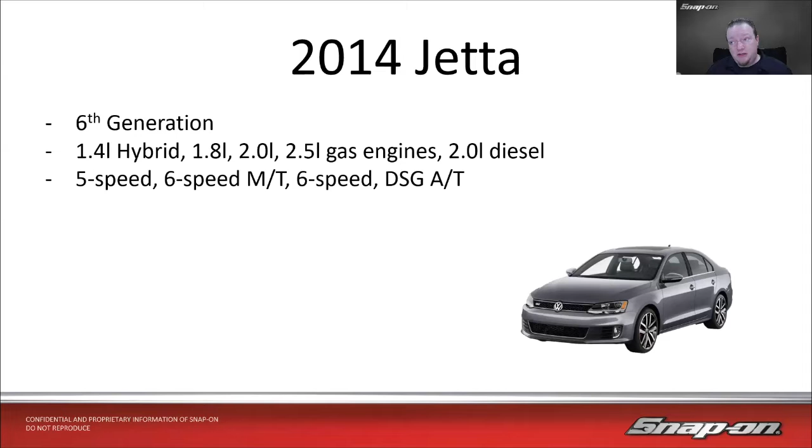And then also, there's a lot more manual transmissions in Volkswagen. It's harder and harder to find a manual transmission vehicle over here now, so they're just kind of hanging on to that.

Representative Audi is going to be the 2018 Q5, because that was the top model, and the top year would be 2018 for sales. It's a second generation - it hadn't been around for all that long. A 2 liter gas engine was the only available one there, at least in the US and Canada. It's a 7-speed DCT automatic transmission, so there's that dual clutch automatic.

And then we decided, like I said, we're not going to talk a ton about Porsche, because I think we're going to actually end up breaking that out on its own, since it's unique enough the way they do engines and things.

The 2019 Macan was the high water mark for that year, and it's been slowly going down, which is not good for them. It is the first generation of the Macan, actually launched in 2014, then refreshed in 16, and now 19 was the second refresh with body panels and styling changes.

2 liter turbo and 3 liter turbo gas engines were available, and it's actually built on the same platform as the Audi Q5, with an automatic DCT transmission. This 2019 model year is where gasoline particulate filters started being standard on the vehicles.

I haven't seen a ton of them over here yet. There's not that many vehicles that use them. Over in Europe it's more popular, the gasoline particulate filters, but I think we're going to start seeing them over here more too. It's very similar to what they do on diesels - just filters out the small particulates in the exhaust, and you have to do regens and things like that too.

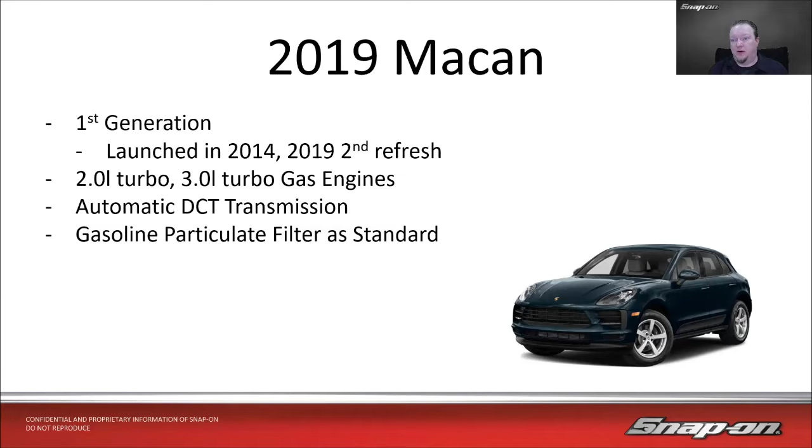So yeah, that is our Porsche representative for this. Let's talk some common issues, going through the data we have - repair orders and such. What are the most common problems that we see?

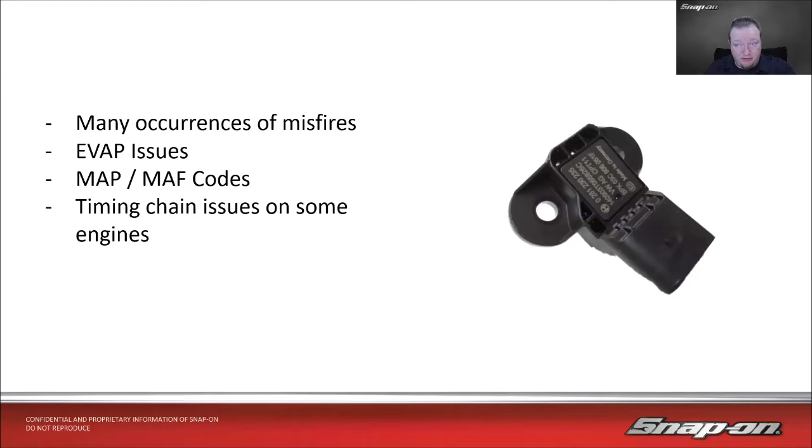Misfires, just like a lot of other manufacturers, a lot of misfire occurrences, a lot of coil-induced misfire problems, evap issues - and that seems to be kind of across a lot of OEMs, just because the tiniest little pinhole leak in that evap system can throw a code since they want to keep those emissions down. Map sensor and mass airflow codes as well - a lot of those seem to bubble to the top for some reason. And then some of the engines also had timing chain issues between the guides, tensioners, and the chains themselves, so a lot of timing chain repairs on certain engines and models.

00262, that's a manifold pressure sensor implausible signal, so that is once again a map sensor issue. The top two codes in Volkswagen and Audi are that. Notice no Audis show up on the list either, but I think that's just because there's more Volkswagens out there than there are Audis.

Another thing to mention here is how Volkswagen and Audi present their codes. Sometimes you'll get it as a P code, sometimes as one of their Volkswagen type codes, like a decimal format. In this case I think this is just Excel messing with the code itself, but this would be P06DA-00, so that's a subcode, and P130A-00, so that's your symptom code.

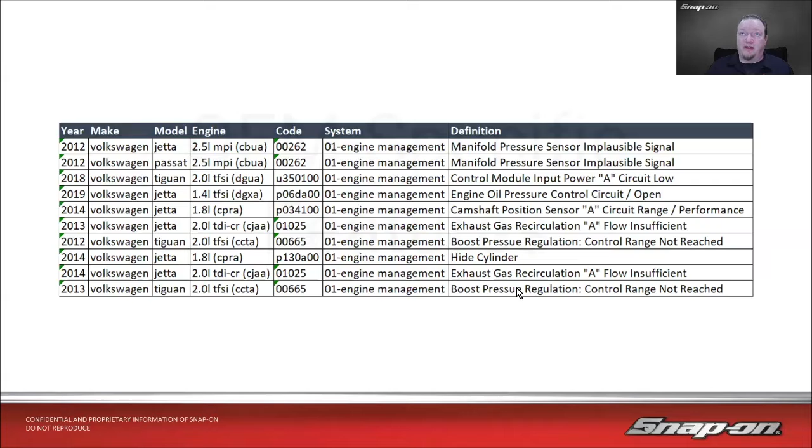So we can see map sensor, cam sensor, EGR valve again, boost pressure regulation - that's map and MAF related as well, so two of those as well. The other thing about the codes too is that if you look them up, you can look them up either way, at least in Shopkey - I don't know about other information systems, but in Shopkey if you plug in either of these formats it'll come up. We'll see some examples when we go live on SureTrack. I just thought that was kind of interesting - that's what you have.

OEM specific features, as far as Volkswagen is concerned, they're not all flashy with technology and things. They'll use tried and true and proven technology that's already out there. They really don't have a ton of special features - I'm sure there's some things out there, but not like BMW, which had variable runner intake, variable valve timing, and variable valve lift, all three on the same car, all sorts of BMW specific stuff. Volkswagen really doesn't have much of that to say.

So it can fit in a space pretty much the size of a four-cylinder, so they can put it transversely mounted in the front of a car and not have to worry about the engine bay. Now, also, I would like to note on the VR engines, this is the front of the engine, this is the back of the engine.

You notice that's where the timing gears are, so to do timing chains on these engines, they're in the back. So there's less stuff you got to take off, I guess, in the front. Not sure how easily accessible it is between there and the transmission, but looking through the service information, it doesn't seem terrible.

I had a buddy who used to work at Volkswagen. He said, yeah, we could just do them right in the car. And I found a way to kind of move this cover a little bit. How flat rate, I was flat rate too - you know how flat rate mechanics, you're going to find the easiest, fastest way to do it, right? So that's what he found. It was something about pulling the cover back and so on and so forth.

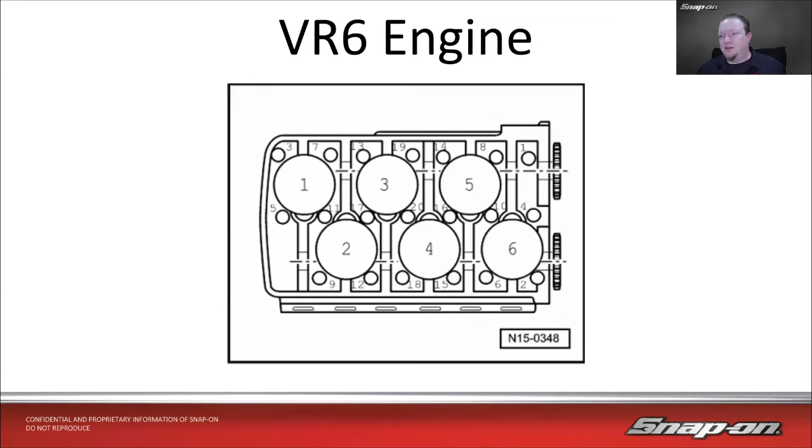So the VR6 is the most common. They also have a W8, so that is like two VR4s, I guess you would say, that they don't have - they don't even have a VR4, so to speak, over here anyways. I think they do have it in an industrial application, but there's no VR4 for automotive over here. But they took two of those VR4s and wedged them together and made a W8. So two V's gets you a W, right?

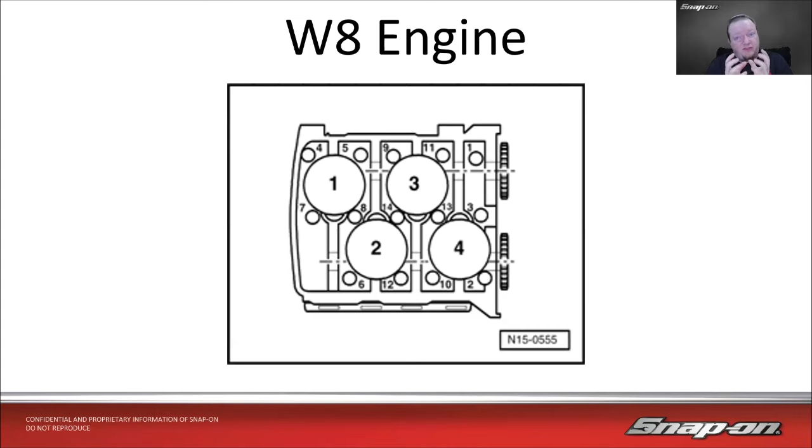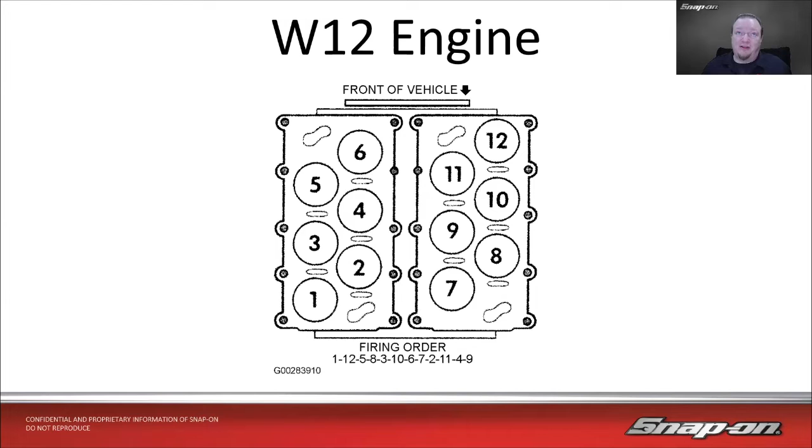So 4 cylinders on one side, 4 cylinders on the other side, and it's like a very small, compact V8, but it's a W. And then they also have the W12 that's out there, and that is going to be two VR6s sandwiched together with a common crank. So that is the unique thing about Volkswagen, is how they do a lot of those engines. I just found that was interesting.

Also unique with this, up until fairly recently, the actuator test, there's no traditional bidirectional controls to speak of. So it's a sequential test - you put it into a test mode, and then it just goes through each of these. Now it's going to cycle them on and off for 30 seconds, and then move to the next one. So when the scan tool does it, it's going to initiate it. You can skip through forward, you can't skip backwards, but you can skip through forward till you get to the thing you want.

But it's only going to cycle for 30 seconds, and then it says before I can reinitiate this, the ignition must be turned off. Then start the engine, turn the engine off, and turn the ignition switch on again. So I got to turn it off, fire it up, turn it off. If the actuator tests are reinitialized without the ignition being cycled, it will say actuator test not possible. Now, this is right from the software manual for Volkswagen on the Snap-on website.

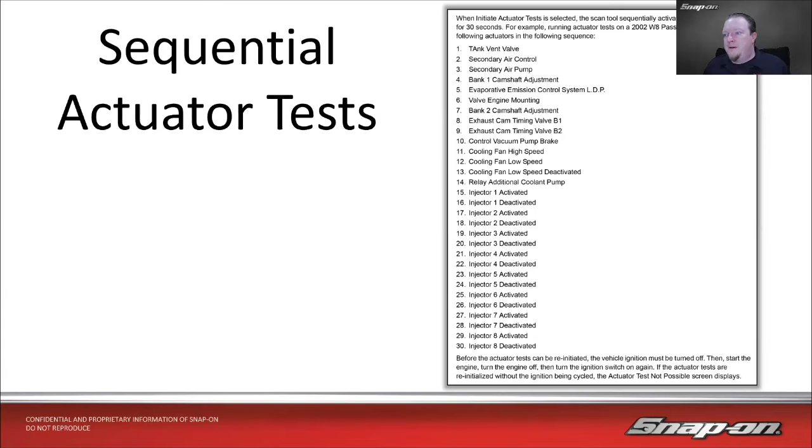So there's a lot of information in there about how to run this, and there's a lot on expert mode too, which we're going to touch on briefly with this. Now, that brings us to tips from a tech - so this would be tips from people who, this is the car they've worked on, they're the resident expert in these cars. These are the tips and tricks that you might not think of if you don't normally work on these. That was one of my goals in doing this class, is to have a section with those little tips and tricks that you might not know, but somebody else does. It's that community knowledge we try to put out there.

So in this case, coil related misfire - like I said, a fair amount of misfires, just like a lot of other manufacturers. But on a coil related misfire, this was Sean Shaw, one of our diagnostic reps, a big Euro guy. Coil-related misfires on the coils that they use, for some reason, doesn't really fail at idle, doesn't really fail cruising down the road at a steady speed - it's going to fail under load. So if you're trying to find an intermittent misfire on these, you have to load the engine in order to get that coil to break up and miss.

So that's just one advice he gave, to do an engine brake or something like that. There has to be some sort of a load on those coils in order for them to fail.

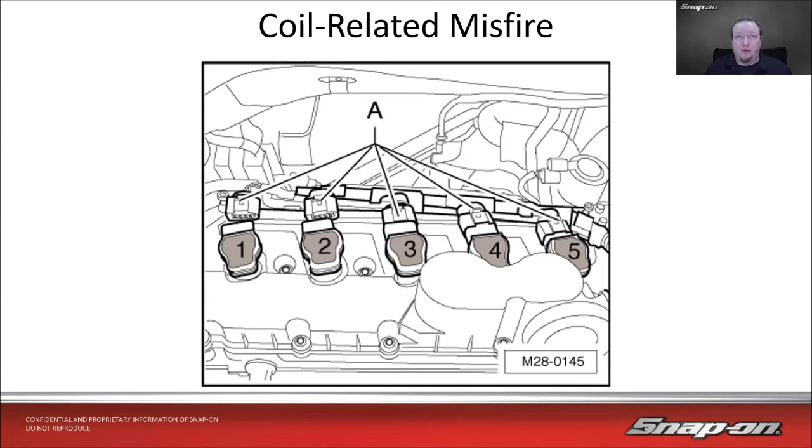Next one's sunroof drains. Diagnostic wise, electrical diagnostics, which we tend to focus on here, it's not really going to care much about the headliner side of it, but we will care a lot about the bottom side, where it goes through the body, because some models have a tendency of pulling out of the holes, like they get brittle or whatever, and then they pull out of the holes. And then you get water on the floor. What's on the floor underneath the carpet is wiring harnesses, oftentimes splices and things of that nature. So if it gets a little bit of water intrusion in there, you can damage the wiring harness.

So a lot of electrical problems stem from this. As a matter of fact, as I was researching this, I found there's like a class action lawsuit against Volkswagen on the sunroof drains clogging and staining the car and getting under the carpet and things. It's definitely a problem, kind of brand wide.

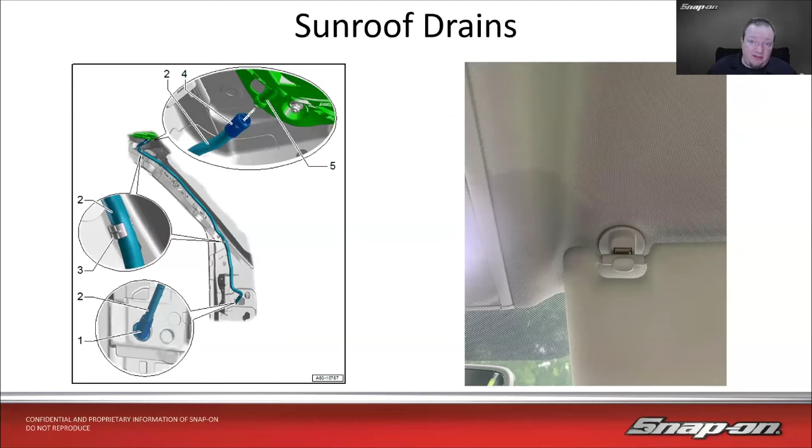So just be aware that if you have some sort of weird electrical gremlin, it could have had water there, maybe it evaporated, but follow the harness under the carpet, pull the carpet back and look, maybe you'll see evidence that it was wet under there. Or maybe you check the drains and make sure they're flowing and they're not backing up either, and that they're actually where they're supposed to be.

Another one that I thought was kind of interesting is special tools. They have a lot of special tools that they require working on Volkswagens and Audi.

But Snap-on, as a corporation, through our Snap-on Business Solutions division, manages their special tool program for Volkswagen and Audi. So if you're looking for a special tool, now you can't necessarily buy them through there. You have to be a dealer, but you can look them up. You can find pictures of them, and then have the part numbers readily available, and then you can go to your local dealer and go that way.

So it is vw.snapon.com and audi.snapon.com are the two for that. I'm pretty sure we do it for other brands, it's not all the brands, but in this case, if it's asking for XYZ special tool, and of course you don't have it, because it's dealer only, then you could just look it up and find it and go to your dealer.

Also, some of these, this isn't necessarily unique to Volkswagen, but it is a tip because some people might not be aware because it's not really across the product line. Some models, like the A8, newer ones, run a 48-volt mild hybrid system too. I'm not going to go too deep into that because I have a whole class on it, but just be aware there's a 48-volt battery in the trunk on this A8. And then in the front, instead of having an alternator, it is a starter generator. So it acts as a generator to charge both the 12-volt and the 48-volt battery, and it also works with the start-stop system. So other manufacturers do that as well.

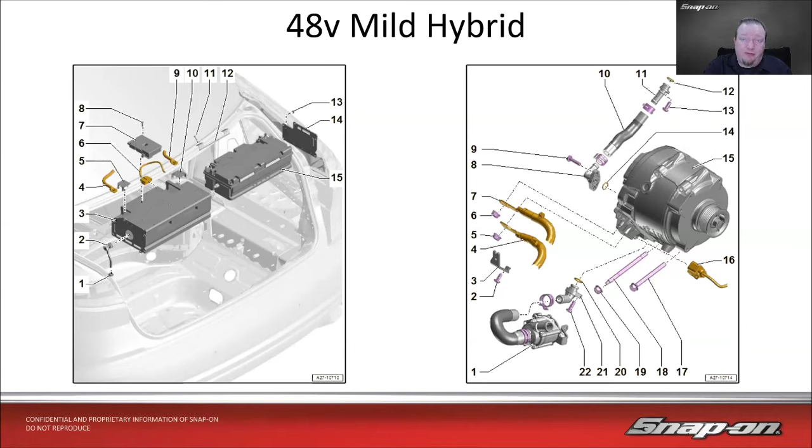So it uses, it runs this in reverse basically with a super tight belt, and it just spins the crank over that way. So you only use the starter once, and then after that, it's all starter generator when it does the start-stop. Go to a stoplight, it turns off. So just be aware if you have some sort of electrical problem, battery problem, some of these have 48-volt mild hybrid systems. That's just to be aware.

Now, as far as OEM specific functions on the tool, engine related tests, like I said, because of the way that they do their sequential actuator tests, you're not necessarily going to have a lot of functional tests called out, bidirectional controls called out. But they are there, especially on the newer ones, they're kind of parted out, but on the older ones, mid-teens and down, it just has that sequential test because that's how Volkswagen does it. A lot of ECU coding as well, a lot of coding involved with these cars.

You can mess some stuff up if you don't know what you're doing when it comes to coding, so you definitely want to do your research on that. But you can change functionality in the vehicle if necessary by doing a coding operation. There's also expert mode in there, which I'll admit we don't have a ton of training on because it is fairly complicated, complex. If you know what you're doing, it's very, very powerful. But if you don't know what you're doing, you can break stuff. So it's kind of a hit or miss. It can be very powerful if you know and understand what you're doing.

This leads me to this line right here: value blocks versus data streams. So in expert mode and on the factory tool, to read the data, you need to know what block of data you want to read. For example, it's like 0 to 255. Any of those in between, there's going to be 4 data PIDs assigned to that block, and you can only look at 4 data PIDs at a time.

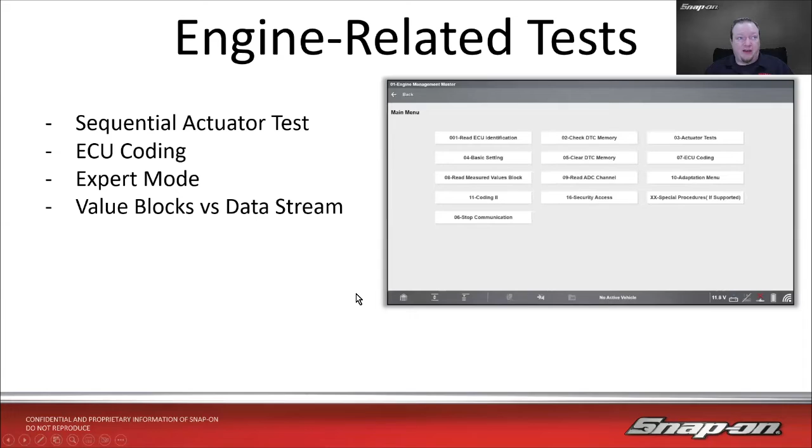Over the last, I don't know, 8-10 years or whatever, we've been bringing a lot of that out. A lot of the things you could do in expert mode, we brought them out of that and put them in the vehicle specific mode. And then also in the vehicle specific mode, you can look at all the data PIDs that you need instead of having to go through blocks. So that's helpful, but just be aware that sometimes you may have to read it through value.

As far as expert mode is concerned, this is pretty much the modules that we covered. Since it's not vehicle specific, it is module specific. So these are the engine modules that we would support with that.

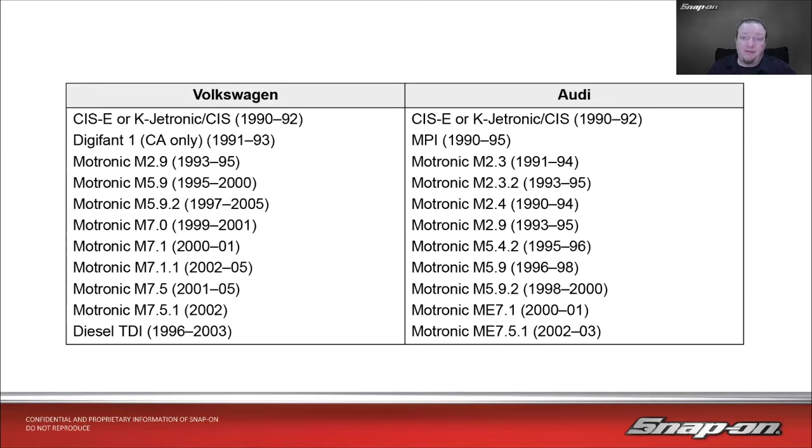Notice how it stops in 05. There may be carryover years further on down the road, but it's not documented, so your mileage may vary when it comes to that. You might be able to get into a 2020 vehicle and do stuff. Maybe a 2020 is probably too new, but on the older mid 2000s and down, you should be able to have some pretty expert capabilities with that.

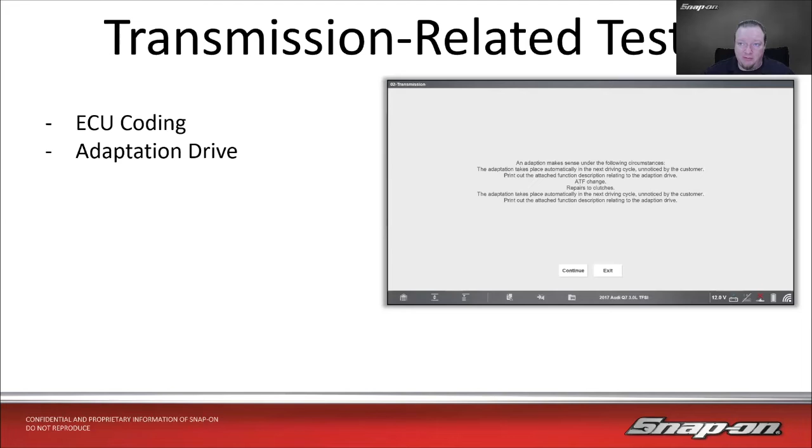As far as transmission related tests, we got ECU coding once again for that. And then there's also an adaptation drive. So what that does is basically forces the transmission adaptation to be on the next drive cycle, unnoticed by the customer, it says in the thing. So ATF change, repairs to clutches, you need to do that. You need to readapt the transmission. So there's a special function.

And then other tests in the vehicle: parking brake replacement, of course, that's always a biggie, brake pad replacement, that sort of thing. There's 2 different modes that you need to do for parking brake. There's also a brake air gap calibration in there on some vehicles. So when you do replace the parking brake pads, you have to set the air gap so they're not constantly dragging. There needs to be a little bit of an air gap there to calibrate itself.

And then, like many European cars, you need to register the battery when you replace it. So battery registration is part of that list there. That's actually what's on the screen right here. So when I replace it, I need to put in certain information in the vehicle so it understands that there's a new battery in there.

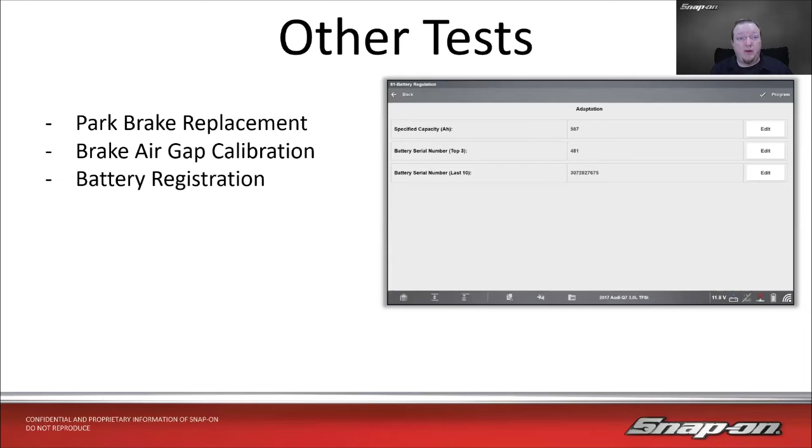All right, with that, let's go live on the tool and take a look at a couple things on our representative vehicles here.

Actually, before I do that, let's go into Scanner and we'll go to Volkswagen. Notice this is a North American software tool, so we have US vehicles. You can also get into European vehicles if they're over here. This is mainly for Canada because Canada gets a lot of European import cars, right from the European market.

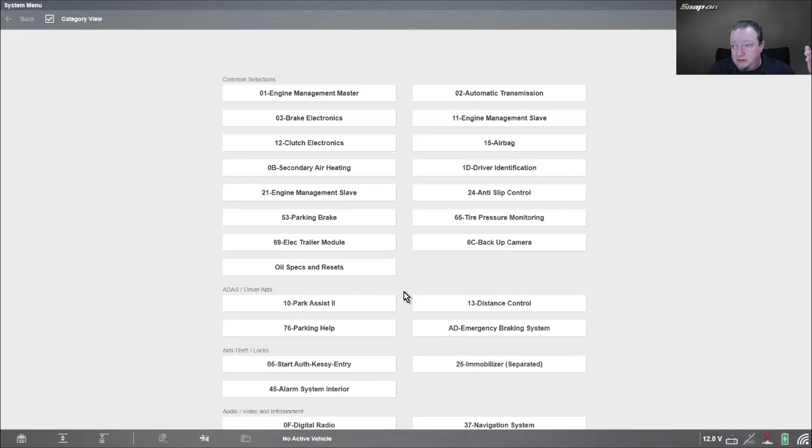And then we also have expert mode as well. So if you go into expert mode, it's going to say ECU may be disabled or corrupted by incorrect use, refer to the user manual for instructions. And we have a pretty good manual for it. Another good resource if you do want to use expert mode or learn about coding or other things like the block data and things like that, Ross-Tech has a really good wiki that's going to be pretty consistent with how our software operates. They have screenshots in there off of their software, so that part's not going to be the same, but the steps will be the same. So you'd go into one engine master and then so on and so forth.

So that's a good resource. In this case, it's going to ask does it have a 16-pin OBD2 connector? Yes. And then you can auto detect or manually select it. I'm just going to pick UDS, which is the newest one.

You must stop communication. There's my simulator. And then you come in here, things like ECU ID, clear and check DTCs, basic settings, codings, adaptations, long adaptations, security access, long coding, special procedures, etc.

So if you actually go into ECU coding, you need to enter your channel number and then what you're going to read. There's actually some tables in our manual to do that. So let's just do 1111, see what that gives us. I don't know what it's going to continue. And then that gives us this code and that. This is a long code—you would need to know what to punch in, and depending on what digits in what place, it's going to do stuff.

Couldn't tell you what, because like I said, I don't have the manual in front of me. And then things like basic setting, I can go into channel values. That's once again a coding function. Find my data. Channel numbers too.

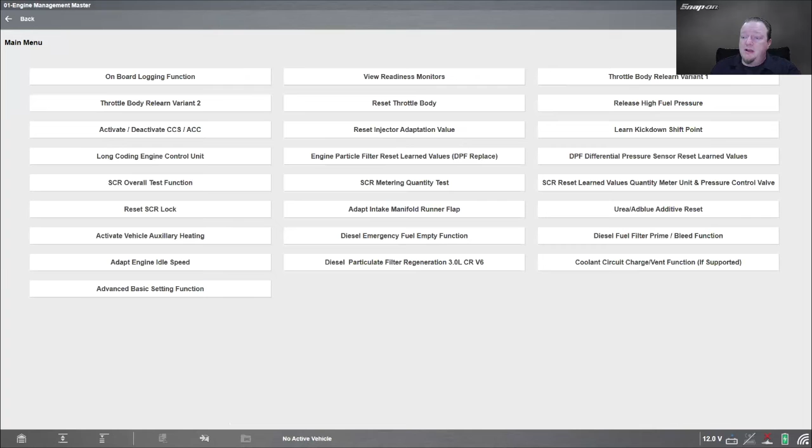With that, all right, so let's go into Scanner and let's go into my Jetta. 2014 Jetta, 2.5 liter.

Also fairly unique—there's not a lot of brands that we do this on, but on Volkswagen and Audi, we sure do. It'll query the vehicle and acquire the list of actual systems fitted, so you don't have a bunch of nonsense on there that's not necessarily on the vehicle. So if you continue, it'll give you a short list. Exit will give you the full generic list, and then you just pick from there.

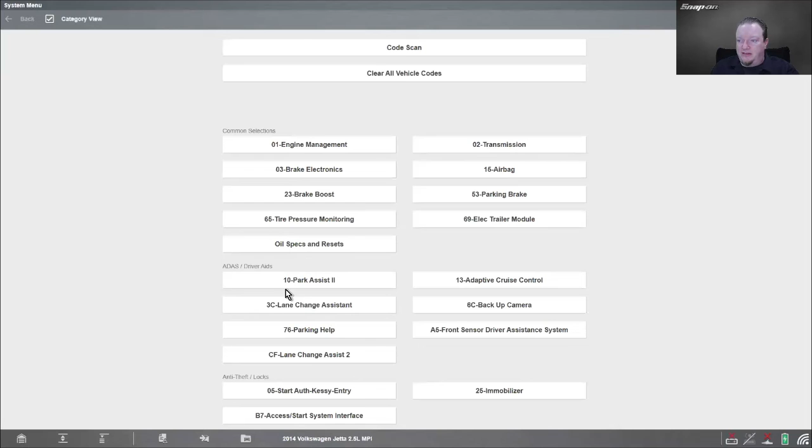Now, another thing that they do, like I said, is they number all of their modules. So that's why you see a number in front of it. 01 is always engine management. So I'm going to pull up, say this one.

All right, so you can see codes, readiness monitors, functional tests. There's actuator tests, and that's going to give you that sequential actuator test I talked about before. I'm going to walk through it.

I think I can do this in the sim. Key on, engine off. Some actuators need special conditions. I think I was able to walk through this the other day. There we go—so it'll tell you what it's cycling, right? So then I can go to next, that's going to cycle. Next, it's going to cycle. Next, it's going to cycle, so on and so forth. Simulator, not 100% accurate to what's going to be on.

Special functions would be like throttle body reset, EGR reset. How about coding? So you can read the current coding, what's in there, and then you can also do it from a configuration list. In this case, we're doing tire pressure monitor. And then you just have to go in here and pick from a menu—so however many times bar there, in that case, kilopascal.

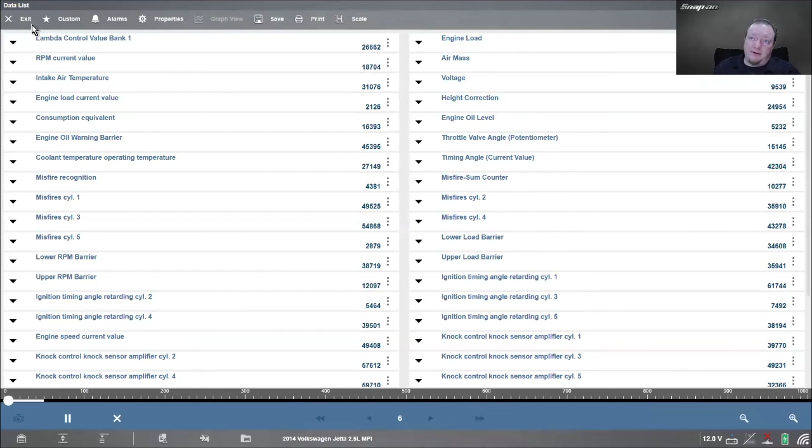All right, another coding function in here—different emissions, gearboxes, that sort of thing. So there's some that you pick from a menu, some you have to type in a number. And then when it comes to data, right, we got data, and we can go in there, and it's just going to give us the whole list of data that's in there versus having to look at 4 PIDs at a time on a data screen. So that's very helpful.

All right, and then we will go to our SureTrack information, and let's see what we can see about what's actually breaking on these things, what actually needs to get fixed. So we see it's over 1 million sold. Yeah, so that's an average of 100,000 a year or so.

So 149,000, 189—2014 Volkswagen Jetta, the 2.5 liter engines have come through shops that we have information on. And you can see disc brake pads, brake rotors—that's pretty common. Headlight bulb, that seems a little high considering, I guess it's an older vehicle, but for 8,800 times, that's a fair amount. Air conditioning refrigerant, that seems fairly high. And over here, air conditioning inop is number 3, so yeah, that kind of correlates. Number 1 code, map sensor, just like the data we had earlier, going to be the same thing. And then actually this one and this one are related.

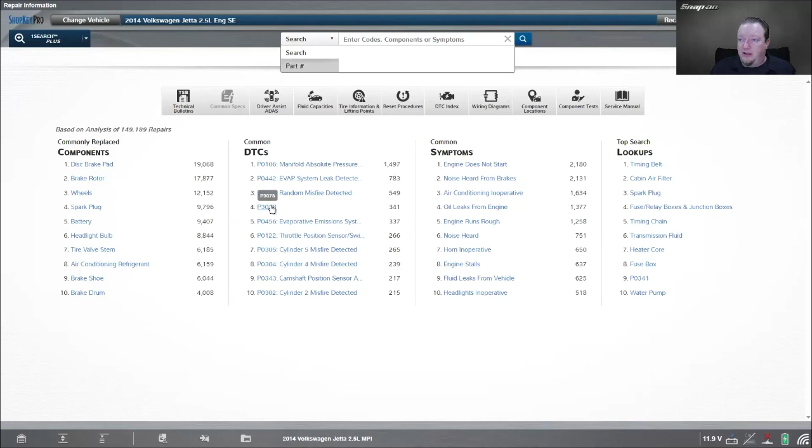So if I click on that, P0106, got to do your engine code. A lot of the different engine code variants throughout Volkswagen. And we can see the P0106. If we go into the OEM testing, it's going to give us different tables here. So there's my 106, going to give you a couple tips, tell you a few different things to do, how long it takes to set, and so on.

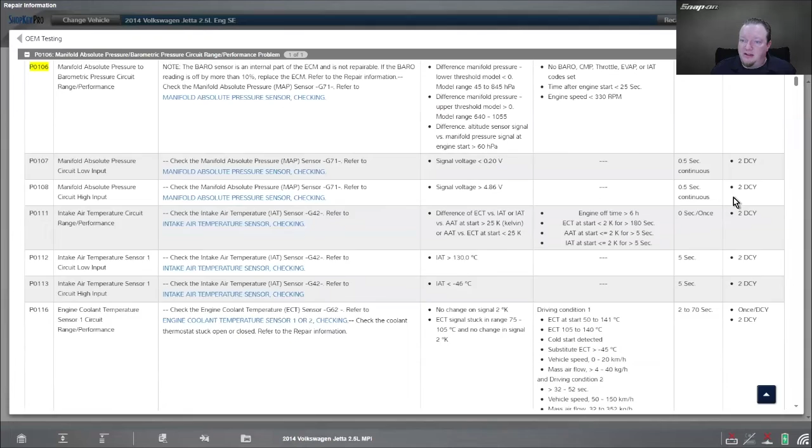So helpful. All right, so that is the Volkswagen. Let's go to the Audi A8. Now, also, yeah no, that's the A8 from... that's something else. The Q5 there. Q5, get out of the A8, get into the Q5. Looking something else up. Q5, there you go. So it's going to have a lot of the same functions between them, the engine.

So there's a lot of sameness across the board, so we're not going to dive into that. But we'll see 7,900 repairs, not nearly as many sales. Pads, rotors, pretty common. Tire pressure monitoring systems, that could be a little high. Coolant thermostat, kind of high. Coolant flow low or performance. Coolant leaks from vehicle. So it looks like a fair number of cooling problems on this vehicle.

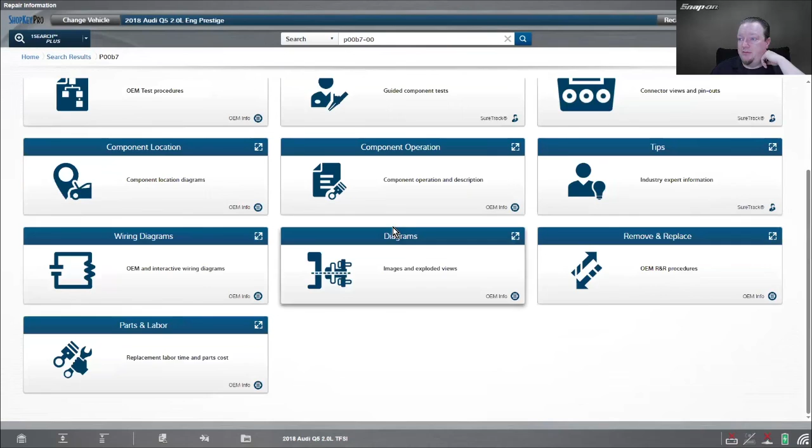And then we see the number 2 code is actually that same code, but with the extra double zeros at the end, so that won't come up. But if I do this, I think it does. Yeah, see, it'll come up with that, and it'll just dial it down to the base code. Right, and then we can see the information that's there. That is on coolant.

So a couple misfires, EVAPs. These are getting down in the single digits though, so I wouldn't be too concerned about that being a common problem. Transmission fluids, the number 1 search. Water pump. So it looks like a fair number of coolant problems, water pump problems on these. We can just see that with the data.

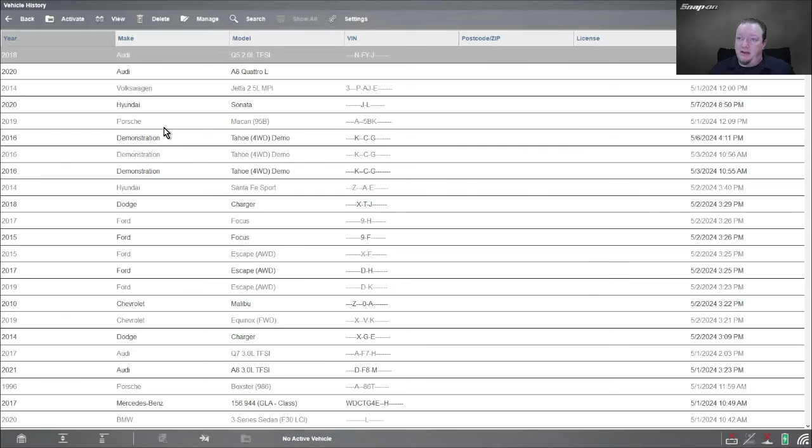And then the last one we'll pick is the Porsche. And like I said, that was not a high seller to begin with, and then it has to break, and then it has to go into a shop. So not a ton of repairs on these. 602, and that's the highest between the 2 engines. So pads, rotors, maintenance items, remote keyless entry transmitter 25 times. That's interesting. Engine oil, a lot of oil things, change engine oil indicators, stuff like that is in there.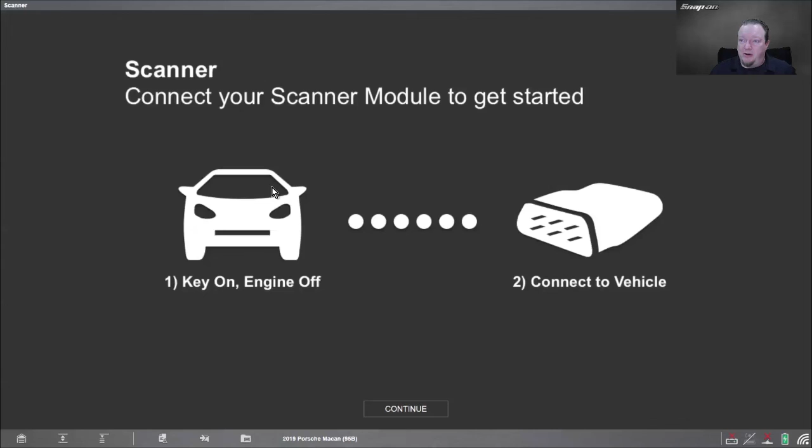And then we can actually pop over to the scanner on this one because there are some different things on this. Once again, you'll notice it doesn't do the 0-1 and such on this one. If I go into the parking brake, I think this is where I found the parking brake special functions. This is assembly position, so move to install position and assembly position. So that moves the calipers in order to do the brake pads.

And let's just look real quick at transmission. I don't know if this one has the quick learn on it or not, but once again, coding in there. Functional tests, calibration. Yeah, so calibrating the transmission. Must not contain any faults. And you can do calibration after selection of sensor module, mechatronic components, etc. So depending on what repair you did, it'll recalibrate the DCT. So that is Volkswagen Audi Group.